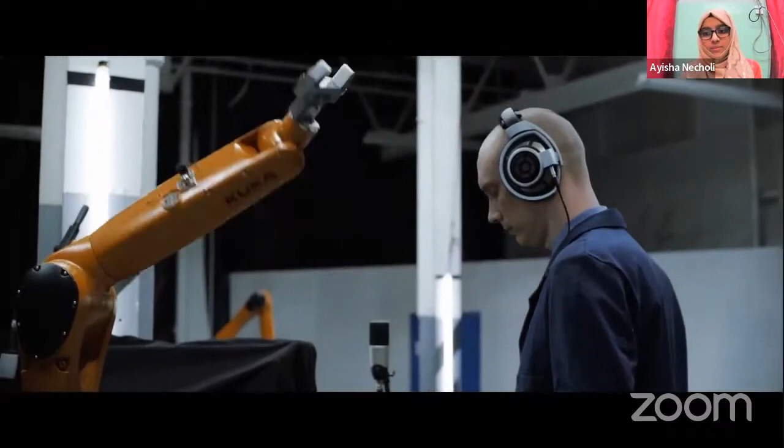Moving further, in this webinar we'll understand what exactly robotics is and the different fields of robotics. You'll get a general idea of what is happening in the world right now. So what is robotics? Robotics is basically a field of multiple engineering industries and disciplines coming together to make machines that are automated, and you don't need to worry if the robot is doing it correctly, or the robot might go on a strike, or the robot is tired or needs a lunch break. No, you just power it and it's doing the work continuously without getting tired.

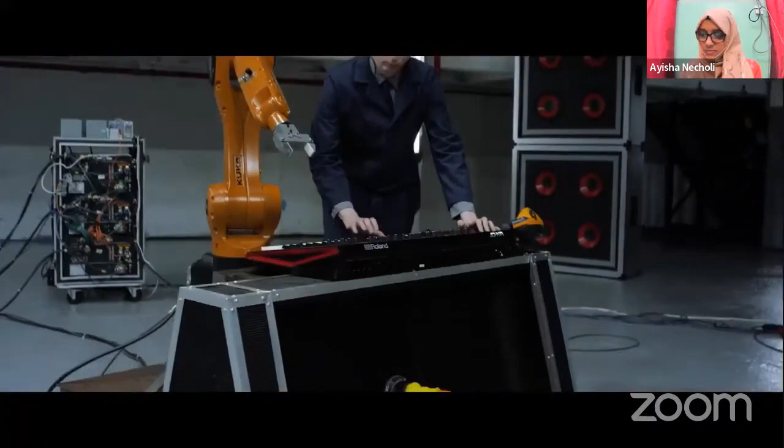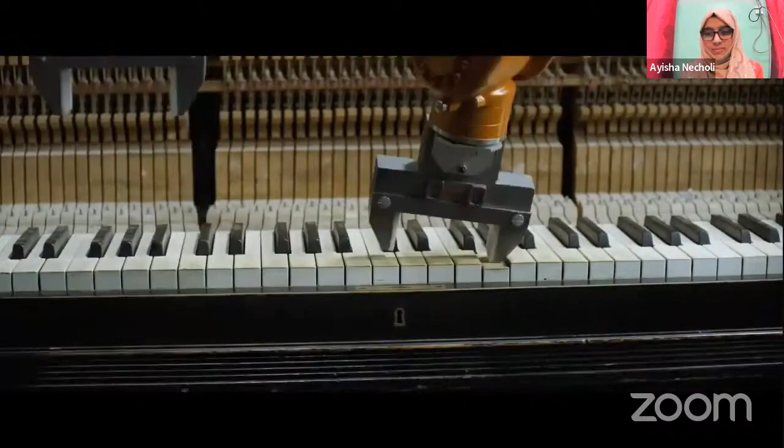You can make a robot do anything. There are limitless possibilities with robotics. It's making human life easier. It's making production faster. The new phones that you want to buy are all made by robots. The new cars that you want to buy are all built by robots. So there are endless possibilities. And as you can see in the video, there are robots that are playing music.

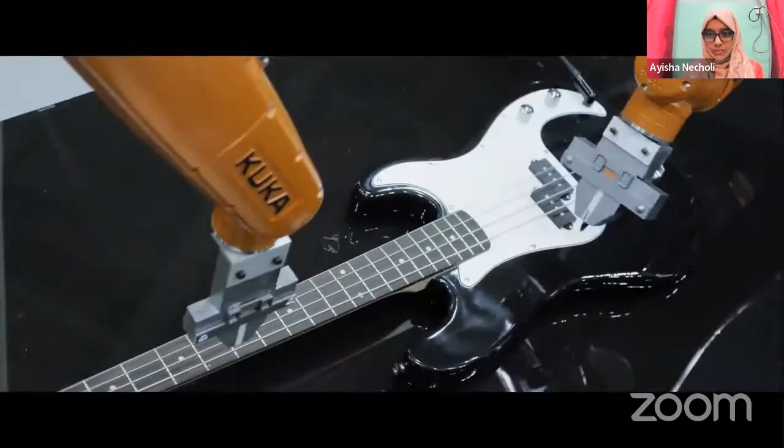This is by Nigel Stanford. He makes amazing videos. He's a PhD from Stanford University and makes amazing videos with a robot. This is a KUKA robot, which is playing guitar, playing different instruments, playing a drum. I'll share the video links later on to the group that we have created.

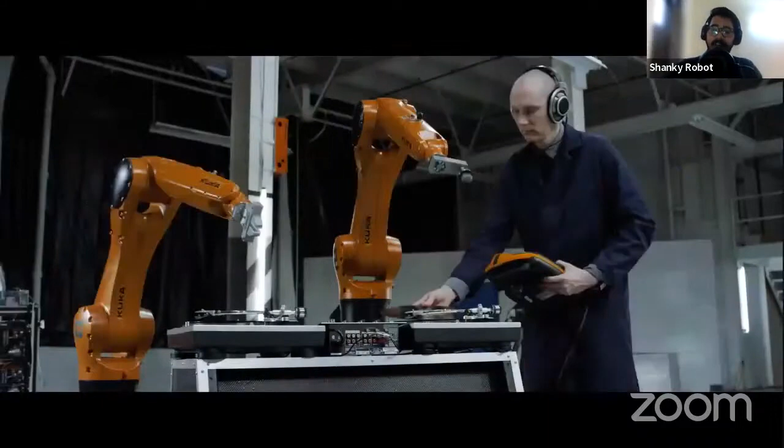Moving on to the disciplines to understand what exactly robotics entails. In robotics, there are three areas of interest, or three engineering fields that get involved very much. First is mechanical, which deals with the kinematics and dynamics. You don't need to understand those words. It's basically dealing with the physical entity or physical world. Mechanics is what touches the reality.

So it deals with the real hardware of the robots: how the robot should look, how the robot should feel, and also how the robot should move. This is what mechanical engineering deals with in robotics. Next comes electrical and electronics engineering, which deals with the power system. You need batteries or power to make the robot move, like we have food to eat, and that's why we walk around. Otherwise, we'll all be tired and cannot walk around. So electrical deals with the power systems of robotic systems.

Electronics deals with two things. One is sensors, the other one is the brain, controllers. The sensor senses the reality and converts it into a language the robot can understand, just like human beings. If the coffee is hot or cold, you'll get to know by touching it. So you're sensing the hot and cold. That's what sensors do. And then your brain processes that, thinking, oh, it's too hot to touch, so don't touch. If it's too cold to drink, I want to heat it up again. So that's what a robot also tries to do.

It tries to sense things, and the microcontroller or the controller basically processes like a brain and tells what is the answer it should give.

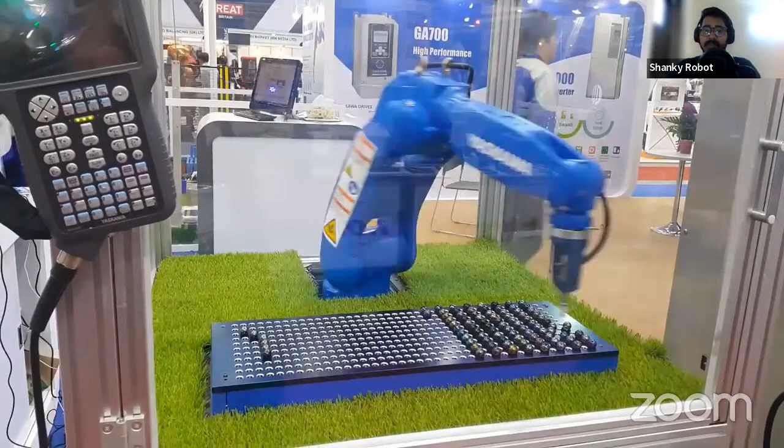So this is one example of a pick and place robot. It's a company called Yaskawa, and it's doing the work of picking up marbles and placing them into designated areas. On the left side, you can see there's a calculator-like object. It's not actually a calculator, it's basically the programmer—it's called a teach pendant or key pendant.

What you can do is put a set of instructions saying, okay, you pick a marble from there and place it there. So it will keep looking and checking if the marble is present or not, and if it is present, it will pick it up and place it there. Now it also needs instruction on how it should pick—so it should go like this or like this. So you give clear, precise, and clean instructions to a robot so it functions clearly and correctly.

You're all wondering what applications or fields of areas robotics would be in, right? So there are different applications. These are the application sectors.

First is industrial robotics, which is a big umbrella under which there are several industries that use robotics. The main core focus of industrial robotics is to automate the whole process, the whole production line, so that you don't need human interference again and again. A human should not need to go and check if the part is correct, or if the robot is doing its work correctly.

So that's what the whole automating system does. And the best part about it is, if you automate a whole industry, you don't need lights, you don't need fans, you don't need air conditioning, you don't need to check if the robot is feeling comfortable or not, or if the robot needs a sweater in cold weather.

So the robot will keep on functioning. It doesn't care, you just have programmed it and it will keep on working. That makes the process smoother, clear, and more efficient and effective. That is what industrial robotics are used for.

So there's a whole assembly line and it's automated. You just put in the raw materials, and the robot will pick up what it has to do. Some robots do the paint job, some do assembly, and some solder electronics onto the chips and PCBs. So that will all be taken care of by robots.

Next comes domestic robots, and domestic robots are a very cool aspect because robots are not only accessible to industries or people working in big factories. No, no, no, no, there are domestic robots as well.

Have you seen the vacuum cleaning robot? There's a vacuum cleaning robot called Roomba, which you just have to put on the floor. It has sensors mounted on it and has its own brain. It will keep on vacuum cleaning your floors again and again at whatever time you set. So you just have to tell it what time you want your floors cleaned, and it will go and clean the floors.

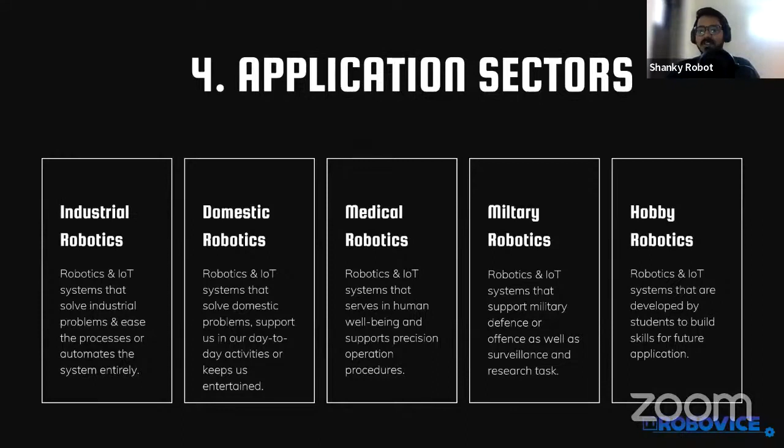And all these sectors where the applications of robotics exist, all started from hobby robotics. So people who start doing hobby robotics end up doing bigger things in life.

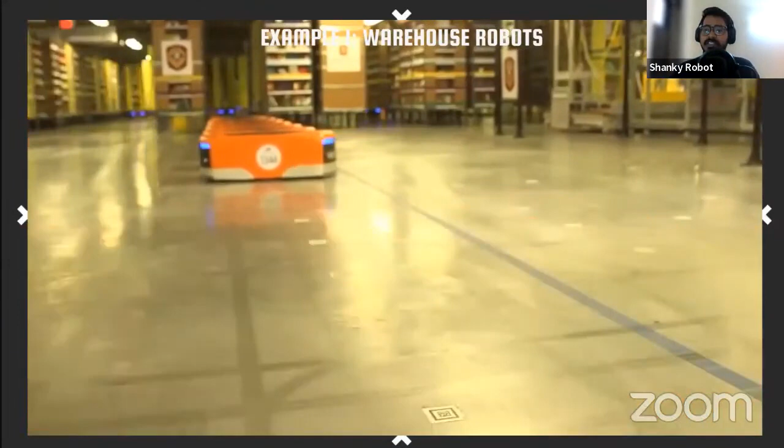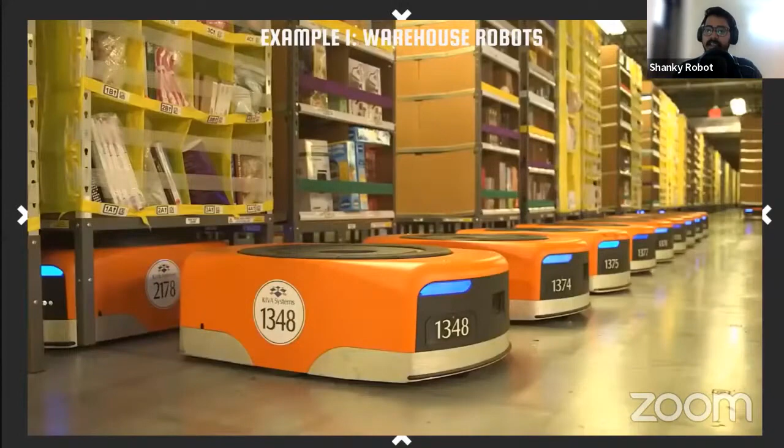Here is a video of warehouse robotics. This is in Amazon, for when you order something online and want it delivered. This robot will go to the rack and scan the barcodes of all the things there. If you've ordered, let's say, shampoo, it will go to the rack where that needs to be delivered, and then take it to a location where the particular pin codes for delivery are taken care of.

As you can see, there are so many robots working together so many times because there's so many people ordering stuff at a time. If you check the whole area, a 1 kilometer area, how many people have ordered right now, you might find thousands of people ordering something or the other.

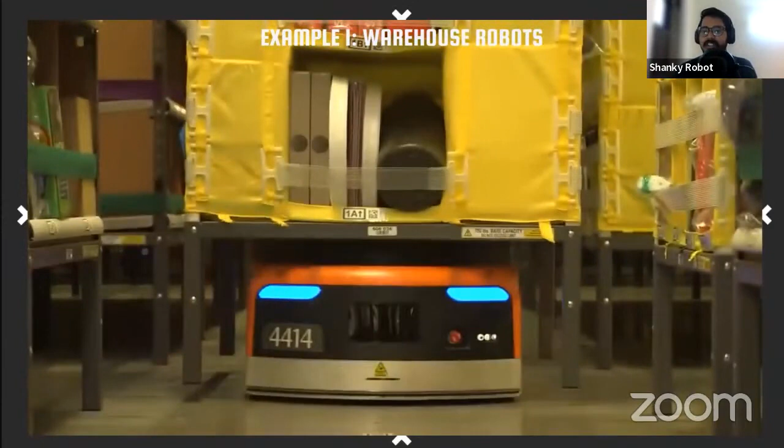This needs to be done. This is a logistics application which is taken care of with warehouse robotics. There are sensors so that it does not collide into something and there's no missing parts. How many times have you lost something with Amazon? Rarely, right? This is because there's less human interaction and more robot interaction, and you can have faith with robot.

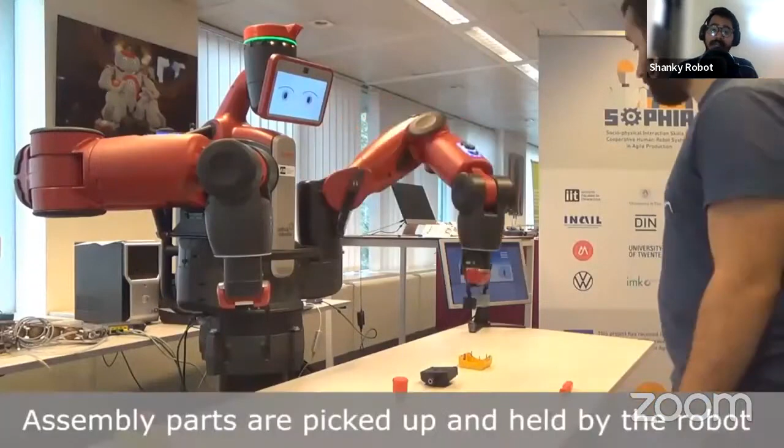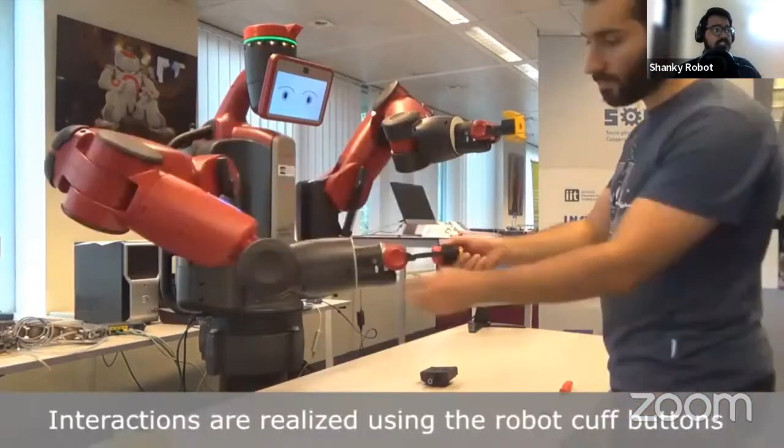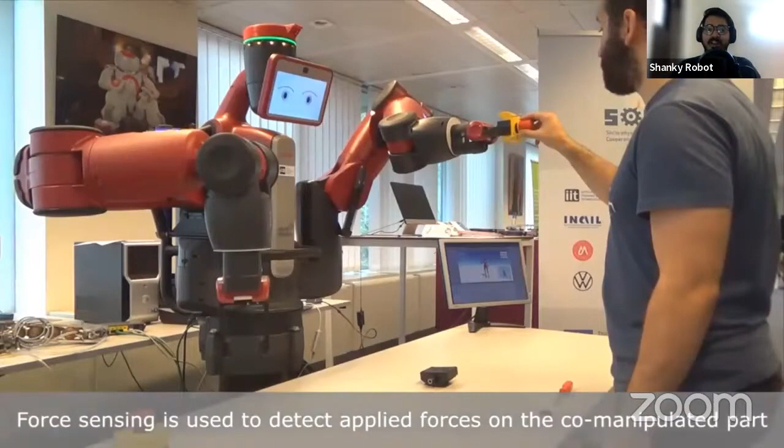There's also something called a cobot, which is a collaborative robot. These are robots that work with human beings. They're not doing heavy major stuff where a human cannot stand beside it. But if it has complete safety features, that will help the robot do work slowly, move slowly, and interact with a human being, just like this guy working with a robot. If you go to an industry where big robots are placed, you cannot enter the space, and if you do, you will be flung away like a cricket ball. So that's what safety takes into picture, and that's why cobots are built.

So you have an assembly line where human interaction is needed. The human does something complicated which a robot cannot perform, and then gives it back to the robot and says, okay, do this, do that.

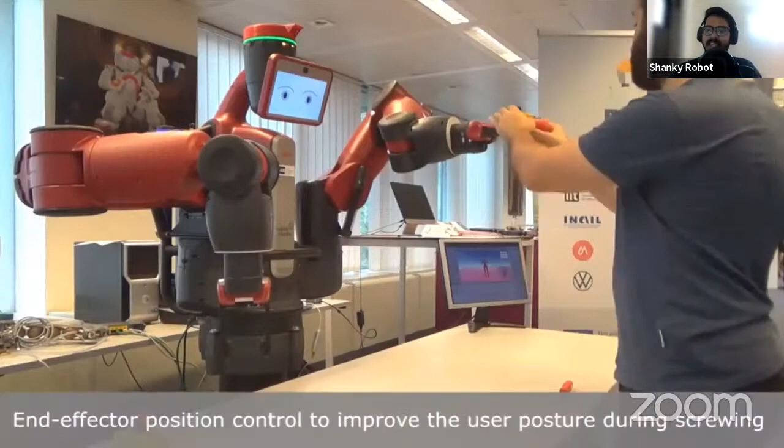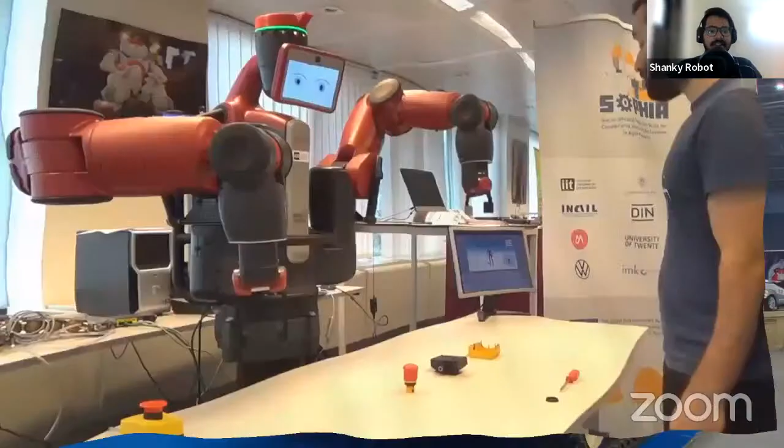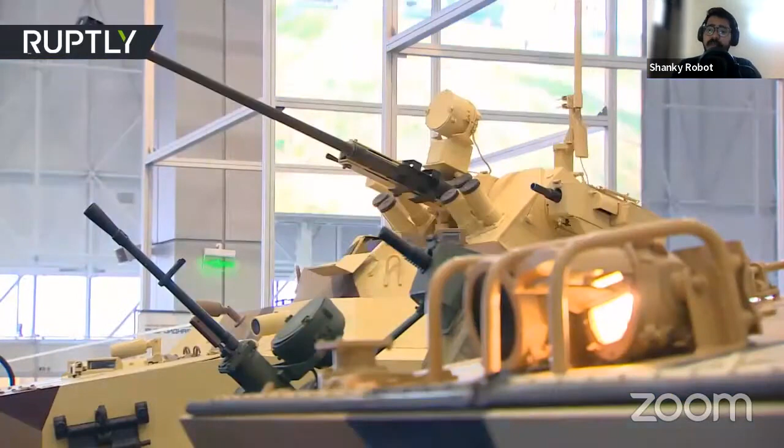There's military robotics as well. There are different tanks and everything that are built autonomously and made so mechanical that you don't have to bother sitting in and going somewhere. You just have a remote control and you can go anywhere that you want. You can do surveillance activity, you can do defense activities. So you're protecting the civilians and moving anywhere, and it's taken care of completely by robotics. These are the surveillance robots.

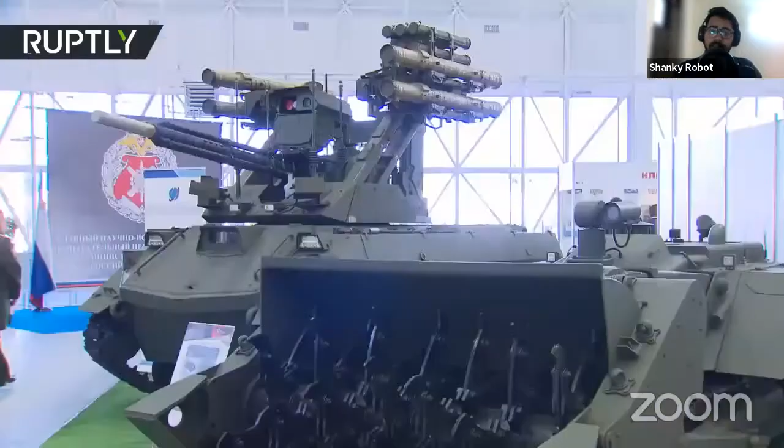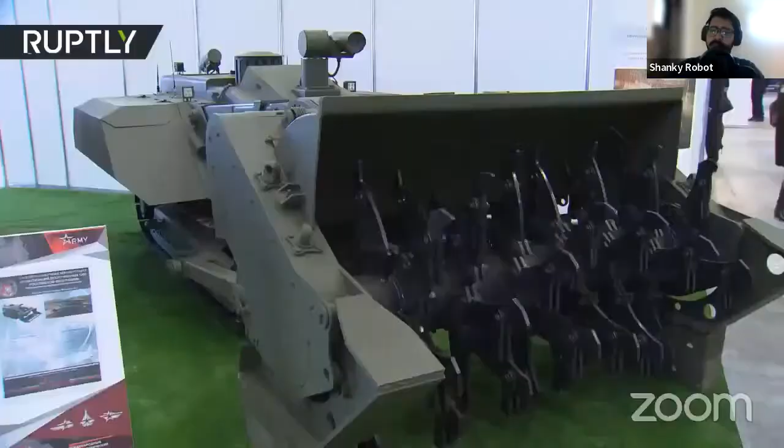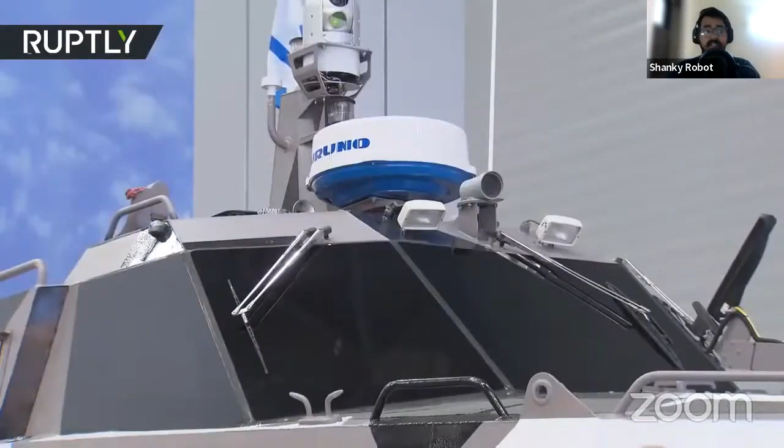There are also places where people are affected due to wars and they need some food or first aid delivered. Robotics plays a role here too, where these are bomb proof and won't get damaged so easily. There's no person sitting and driving the car. There's a person who is far away, probably thousands of kilometers away, driving it with a remote and delivering things that people require. So this is where robotics also takes over in the field of surveillance activities as well as military robotics.

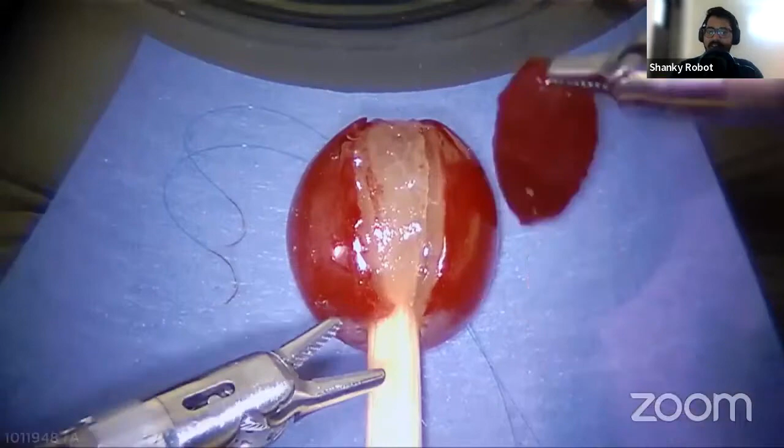This is a video I was talking about, the surgery of a grape. They have peeled off the skin of a grape. The grape is this tiny and they're trying to suture it back. This is controlled by a doctor who is sitting away, probably thousands of kilometers away.

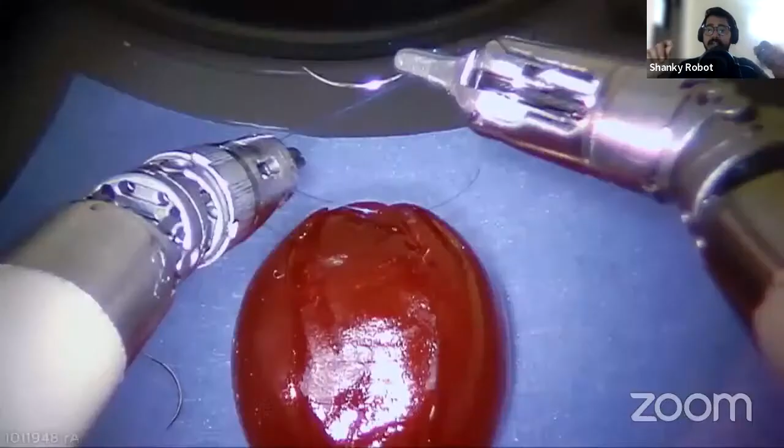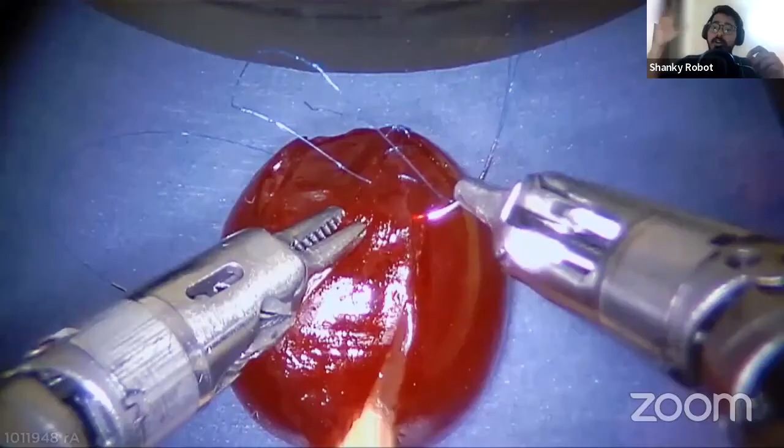He's controlling it with joysticks and pins that they use to control it, basically a teleoperation. What they do is the surgeon performs a very clean operation. The safety feature is that if the surgeon sneezes while doing actual surgery, that's a bad thing, you don't want something poking like that when someone sneezes. So there's jerk protection, where if there's movement happening very fast, the brain of the robot does the processing and the robot moves as slowly as possible, doing clean work.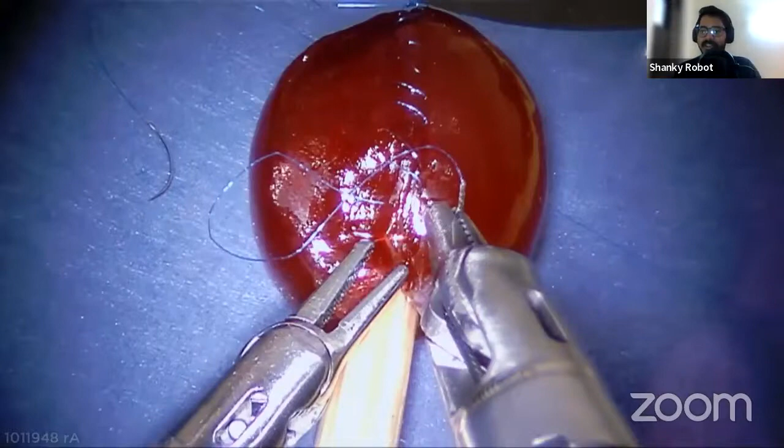As you can see, the surgery of the grape is happening very successfully. I hope the grape is doing very well right now and has a good recovery.

Moving on to the next application sector, there are applications of robots in space. Instead of sending people to space and wondering if they will come back or when, they're using robots. Robots can do much better and can stay in space for longer. There are so many applications, like ISRO, NASA, and several other companies, SpaceX, building robots that can go into space and do space exploration. That's what we're trying to find out: where it all started, what is there on other planets, can we live on another planet, and can we make a house on another planet.

There are even plots that are sold on the Moon and Mars right now.

So it's endless possibilities, and robot is making it happen. There's also food related robotics.

Food related robotics is always used in food processing industries. If you want cheese or any food that is very clean and hygienic, a robot will do a better job. You don't want someone's hair falling over your food and getting it packed, right? That's bad and gross. Robots are pretty clean in that sense, and you'll get food that is very well processed and even.

If you take a packet of Lays or Coca-Cola and taste it, the taste you've tasted on the first day will be the same the next year, and the year after. That's how it maintains a stable output and even quality of the food.

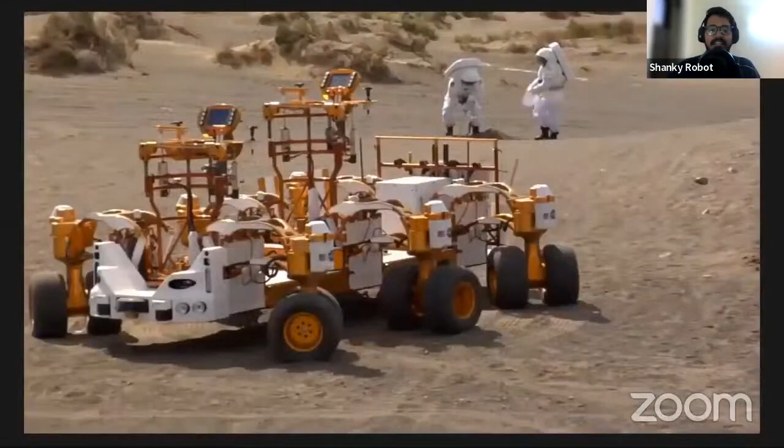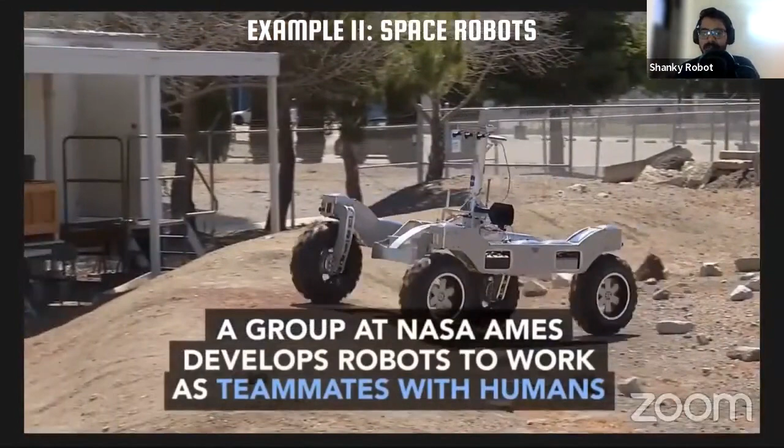Here is an example of space robotics that NASA is doing. NASA is preparing quite a lot of robots for space exploration. It's both manned and unmanned mission, but they're planning more for unmanned work, basically. Sending a person to space and calling them back is very expensive, and it's very scary and hazardous as well. But if you're sending a robot, you don't have to bother about it coming back.

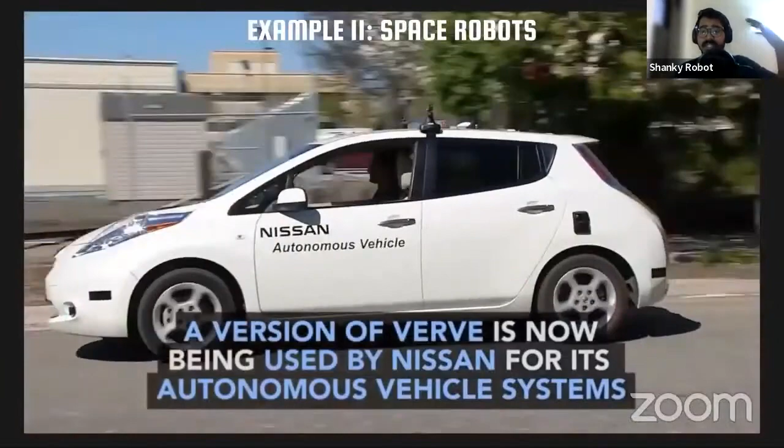You're like, go, it's okay, we'll build a new one. So that's what is happening with NASA—they're building so many robots and sending them into space. Due to NASA's development in space technology, this is possible.

Driverless cars are possible because of NASA's technology built on robotics. So Tesla building a driverless car, or other companies building driverless cars, it's because of NASA's technology, where they have added sensors so the robot can move autonomously without any instruction given beforehand. It just needs sensor data, and it will keep on moving and going, and you can sit easily and comfortably in a driverless car.

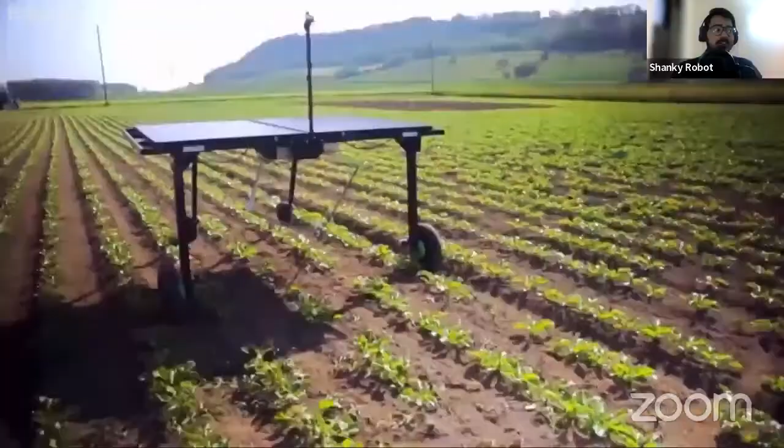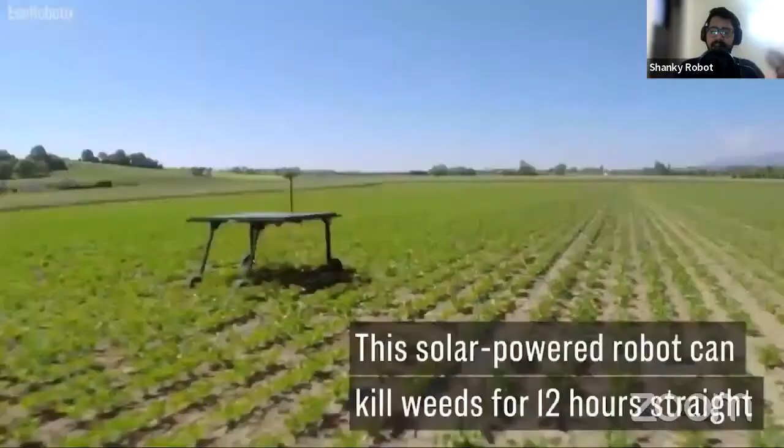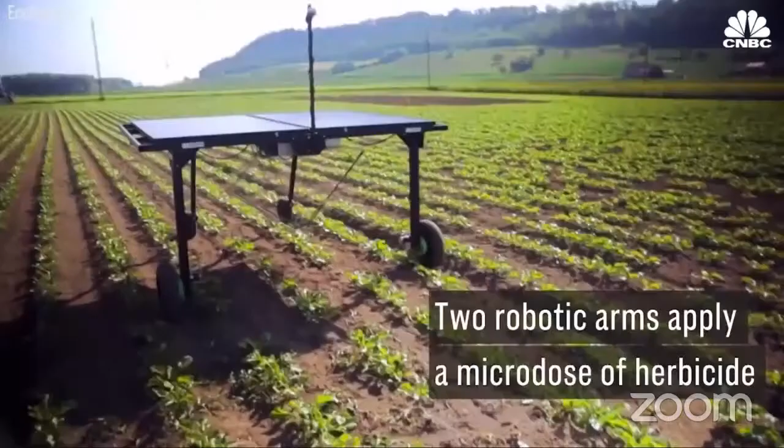There's also robotics in agriculture. There's farm tractors, and there's something called weeds that grow around the plants. These basically take the fertilizer and nutrients that the plant actually needs. It's like the weeds are eating the food out of someone else's plate. You want tomatoes to grow there, but some other plant is taking the nutrition from them, so you end up with a weaker crop or smaller tomatoes.

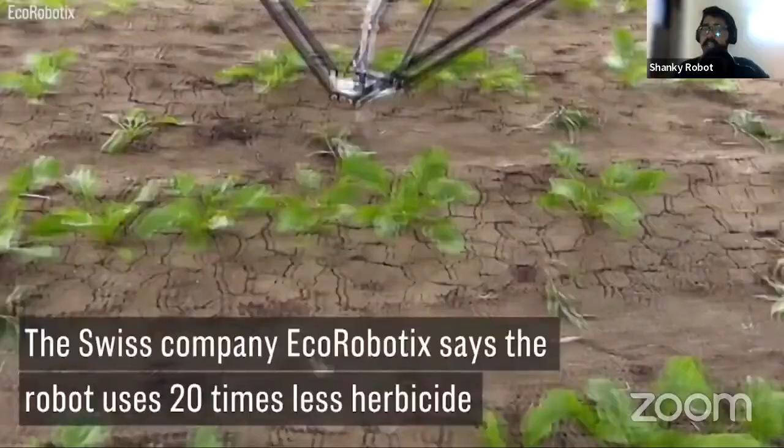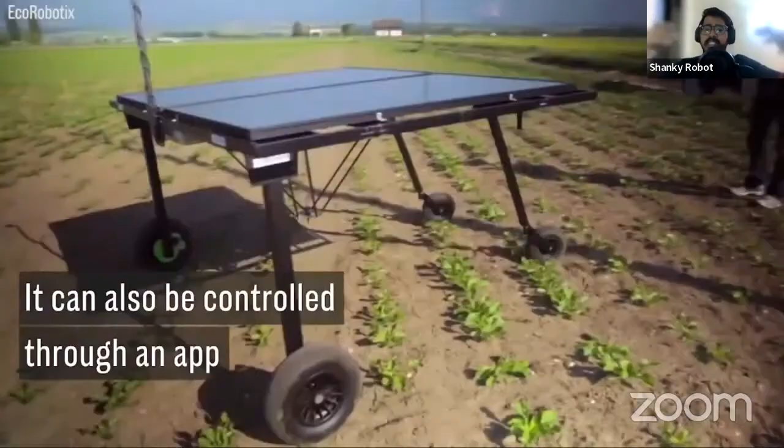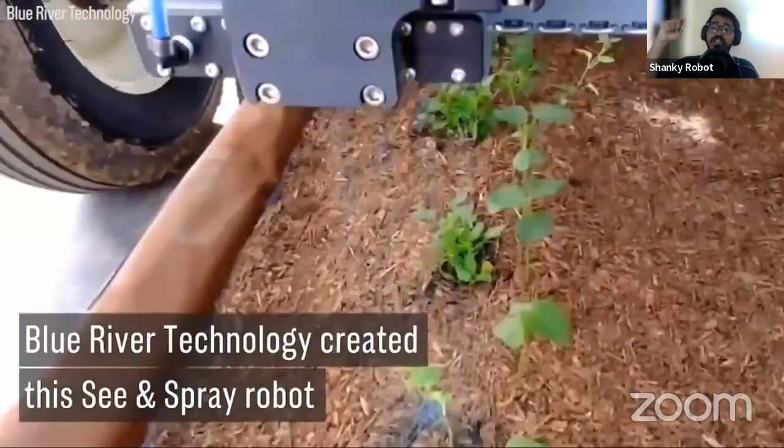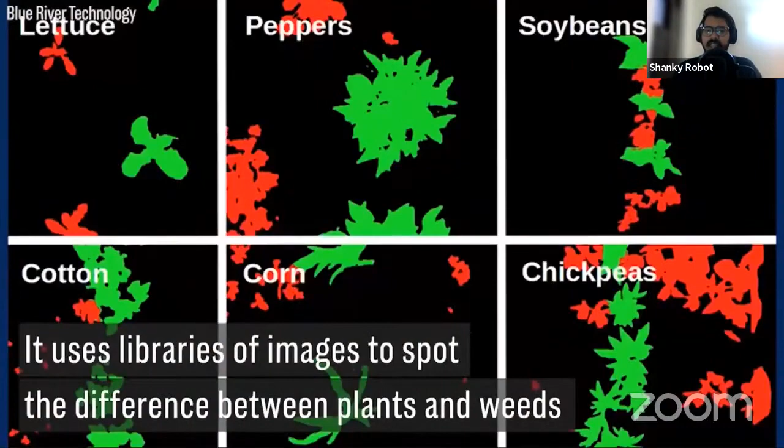So these are robots that try to kill the weeds using artificial intelligence and a computer vision system. They use a camera to check which is the plant that it actually needs and which are the bad plants growing in, then target and kill that specific plant. Initially, pesticides or herbicides were sprayed all over, which would also kill some of the weaker plants, and in the end the production quality or quantity was low. Here, because it's targeted to those particular bad plants, the overall yield of crops is really good, and not all your plants are sprayed with toxic chemicals, so you get a clean, good output yield.

This is also one of the cool robots that's there - an entertainment robot. This is a toy robot, and it can dance, sing, and do cool motions. These are robots built to teach kids, to play with kids, as well as talk and communicate with kids. So imagine having a robot at your home where your kid learns directly from the robot - instead of me teaching, it would be a robot teaching in the future.

As you can see, there are so many motions that a robot is doing. All you saw was industrial robots, farming robots, space robots - this is a humanoid, tiny humanoid robot. It looks like a human, and it dances pretty much like a human. Michael Jackson would be very happy looking at this. So that's what robotics is - it's endless possibilities.

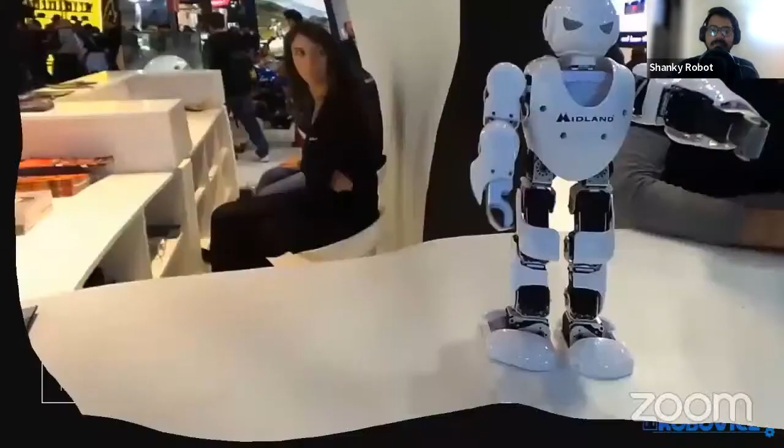Now going to logistics, there's something called warehouse robotics, where your material is being shipped from one place to another. There's two types of warehouse robotics. One is internal - you get the raw material and determine where it should be sent internally. Some parts need to be cleaned, some washed, some painted, some assembled. These are all what internal warehouse robots do. This is what Amazon is doing in their internal warehouse, where they try to locate where they've kept the material and make sure it's shipped to the correct location in the end.

There's also a bigger scale warehouse robotics, which handles sending things externally - carrying out the logistics. There's driverless cars, driverless shipments, driverless airplanes as well. You just put things on autopilot and can sit and relax, and it will reach the destination very carefully and precisely, so you don't have to worry about it. This is what robotics is doing.

Initially you had to wait quite a lot of days - if you ordered something online, you had to wait probably 15 days, 30 days, sometimes even 3 months just to get something. Now Amazon warehouse has done so much implementation with robotics that you can order something and it will be delivered next day. There's also a possibility it will be delivered the same day itself. So this is what warehouse robotics is doing.

There's also cloud robotics. Cloud robotics is technically not a hardware robotic system, it's software based. Here, what you're doing is controlling robots via the cloud, which means via the internet. Cloud basically means the internet and a storage device, so you don't have to think clouds in the sky control robots - no, it cannot. You connect it via the internet, and you can control a robot that could be sitting somewhere else, like let's say you're in India and you want to control a robot in the US - you can sit here and control the robot in the US.

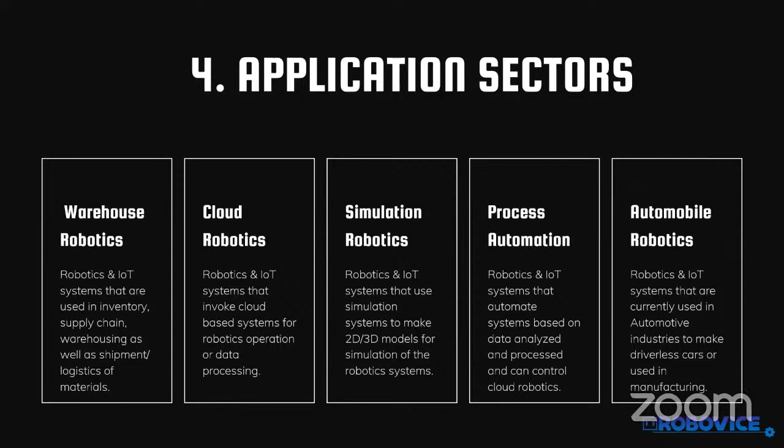If you want it scheduled at 7 p.m. at night, or 7 a.m. in the morning, or 3 a.m. at night, whatever is possible, you can just automate this process. This is just one tiny example. You can process-automate a robotic system as well. So if the robot is doing some work and you want it to do some other work, you can just schedule it so it can do other work as well. So it could be tightening a bottle cap, and the next application is sealing chip packets. You can do that with process automation.

Then there is automobile robotics, which is driverless cars and the manufacturing of those cars. So robotics has taken over the automobile industry, where now cars are driverless. They are basically a robot where you can chill, sit, relax. You just have to enter the destination. It will take you to the destination. You will reach safely. It will avoid as many accidents as possible and will not break any traffic laws, which is very, very important. That's why it's very difficult to get driverless cars in India.

Like, nobody follows the traffic laws. So the driverless car that you build has to break some rules just to be able to drive in India. That's why automobile robotics is also taking over. It's a joke. Don't take any offense over it.

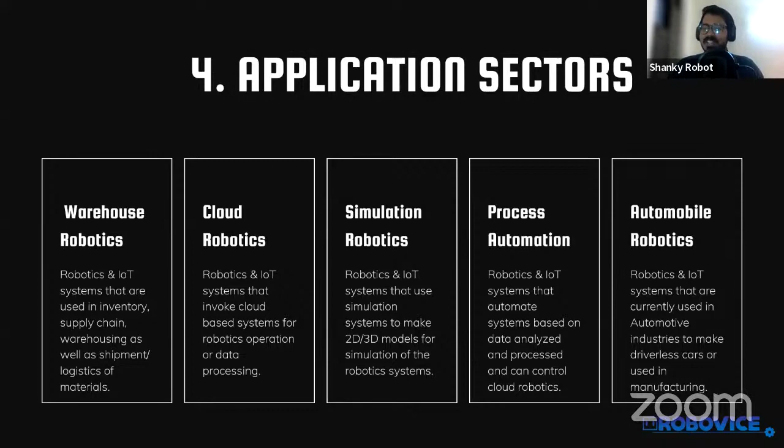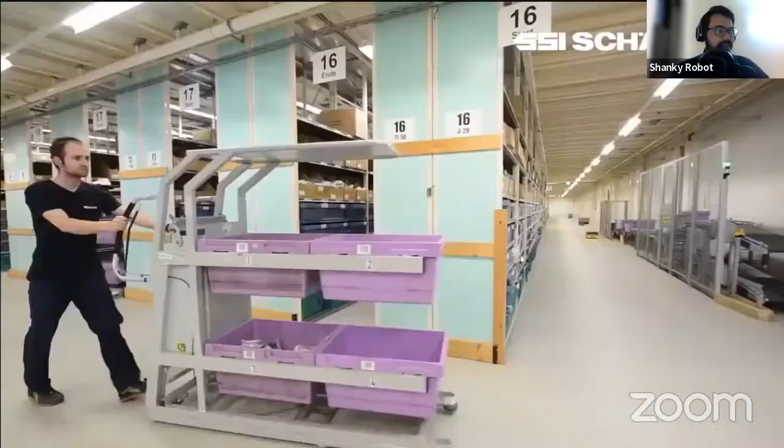So here is an example of internal warehouse robots, where robots are given a particular path. So it's a fixed path. They have drawn certain black lines over it. It's a magnetic strip, and the robot is moving, and it's taking parts and materials that are required from containers which are delivered to it. It will take them and deliver them to the station where they are required.

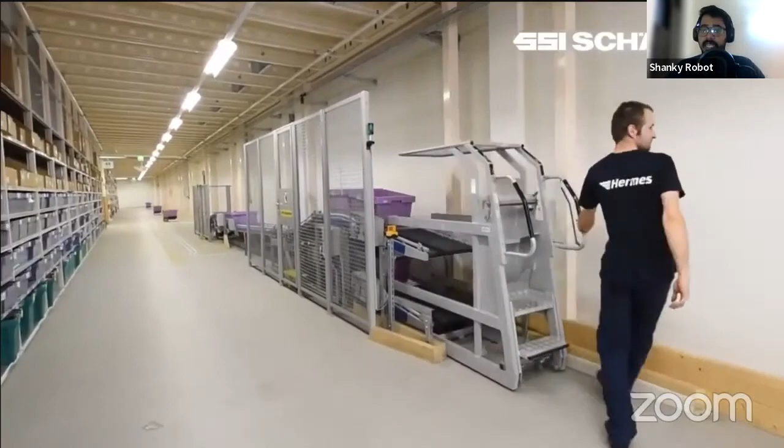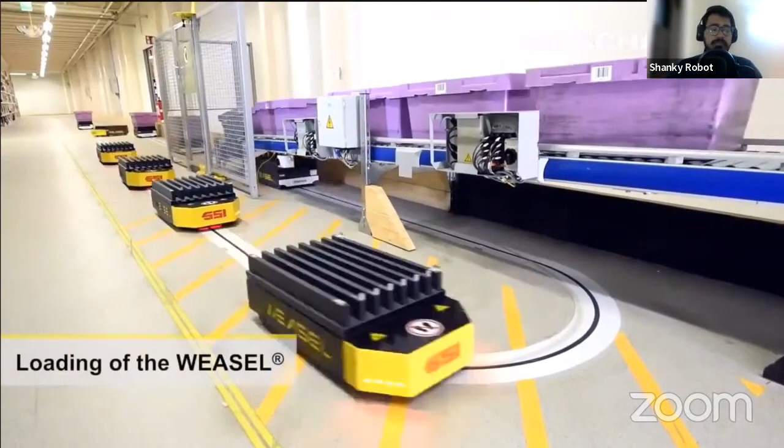So if there are electronic parts, it goes and takes them and delivers them to the electronics engineer. If there is a mechanical part, it goes and delivers it to the mechanical engineer. If there is some fabric, it takes it and delivers it to the tailors. So it could be anything.

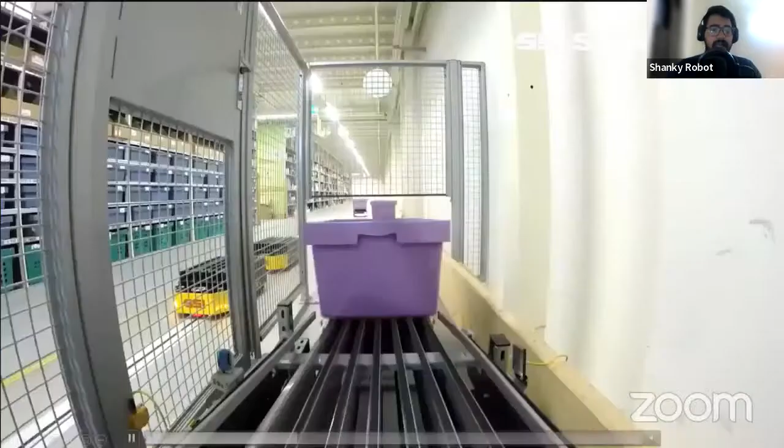You can have different materials, and the robot will go pick it up. As you can see, it's picking up the boxes and taking them to the designated area. There's a magnetic strip at the bottom, as you can see this black line shining. So this is what the track is. It will not go away from the track.

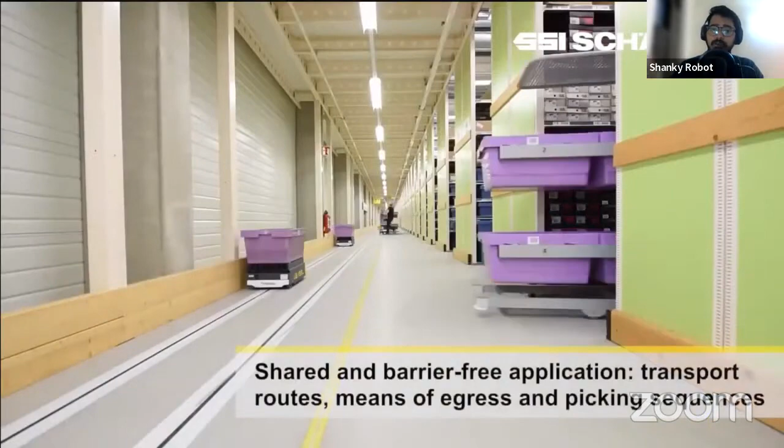It will keep on following the track, and it has sensors mounted on it, so that if someone is standing in front of it or walking through, it will stop completely and will wait till the person has completely moved. This is what is happening in warehouse robotics.

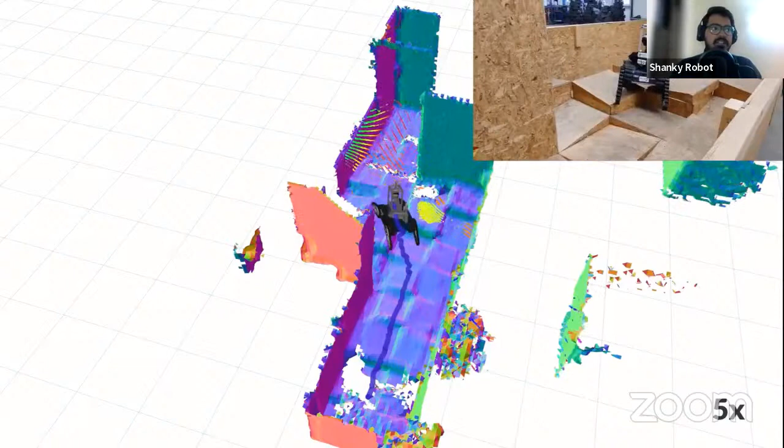Here is one of the mobile robotics. Basically, this is robotics that is built to navigate terrains which are not nearly possible. So, off-road, like this. There are weird steps, and the robot has track tires with a different mechanism put over it. So the robot can navigate and move in this particular terrain, and it's doing all the work

of mapping. On the left side, the colorful diagram that you see is the sensors mapping the whole area, and they're taking note of what the terrain is like. This is what the robot is doing. It's taking the map, and once you have the map, you know which path to take to go where.

If you didn't have Google Maps, you would be asking everyone, hey, where is this temple, where is this place, where is this hotel, or where is this location. Basically, once you have a map, you have stopped asking questions to a lot of people. You just open the phone, you check the map. Oh, it's somewhere here. You go in, and if you don't find it, in the worst case scenario, then you go and ask someone where the location is.

Basically, this is what a robot is helping in doing. Google has also mounted several robots, several cameras, taking street photos, mapping the area, mapping places which you did not know were just beside your house. Okay, there was a hotel here, or there was a grocery stand there, you do not know, but because of all the mapping that's happening, you can find things out.

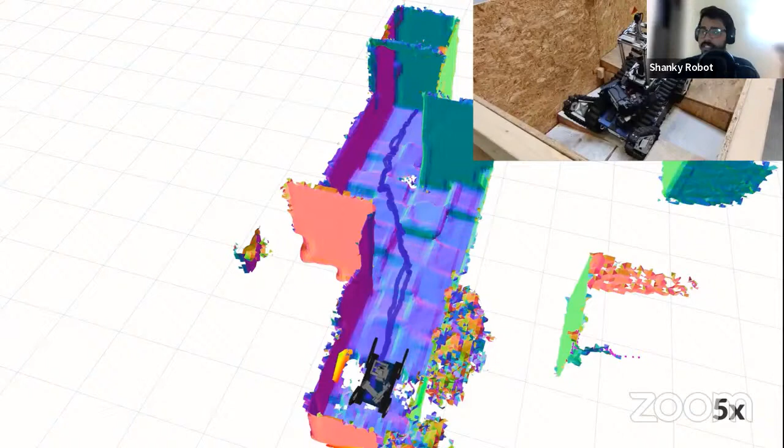This is what a robot is capable of. And it's also showing the capability of a robot moving in a different terrain. It's not just flat surfaces, it can move into weird structures, weird terrains as well.

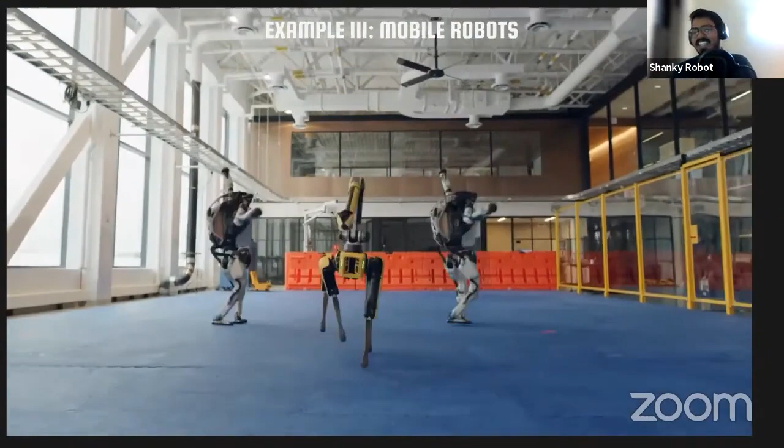And the last application of robotics is dance. This is a company called Boston Dynamics, which has made amazing robots and amazing developments in the field of robotics. The white robot that you can see dancing like a human being is called Atlas. This small yellow robot is called Spot. The big robot that came in is called Stretch. So these are the robots that Boston Dynamics has built.

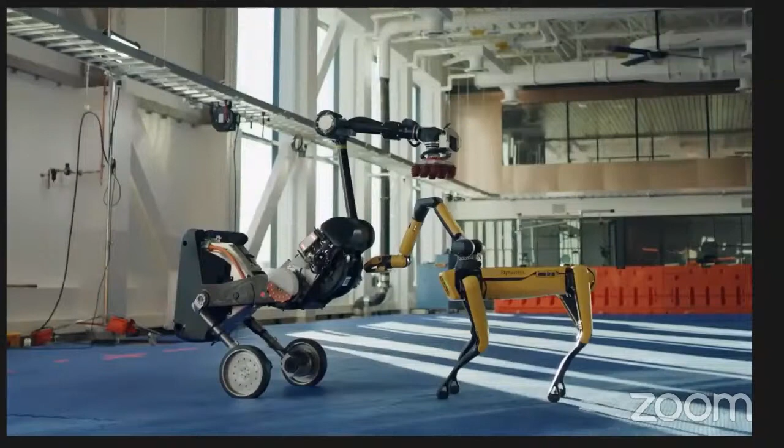And this is not a CGI video. This is literally the actual dance that was programmed into the robot so the robot can do the dance. And you can check this out on YouTube. There are several videos like this. They're dancing differently and making cool motions. So it's a fun company, and it's one of the top, most R&D based robotics companies.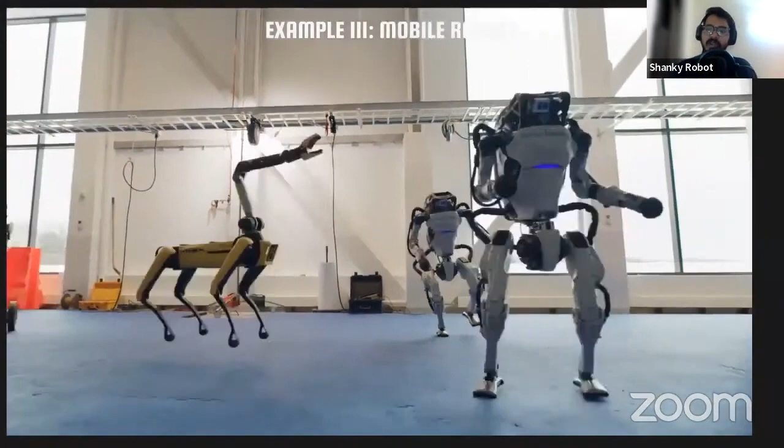I think we are done. Yeah, we are done, thank you so much. Thank you for joining - the way you said it so passionately, using humor as well, I loved it. I didn't expect these many questions - Mashallah, so many questions were there, and I think we were able to help at least a small amount of students, I'm so happy about it. This is our first webinar, we can have more webinars together, right Shanky? Yes, definitely, thank you so much everyone for joining.